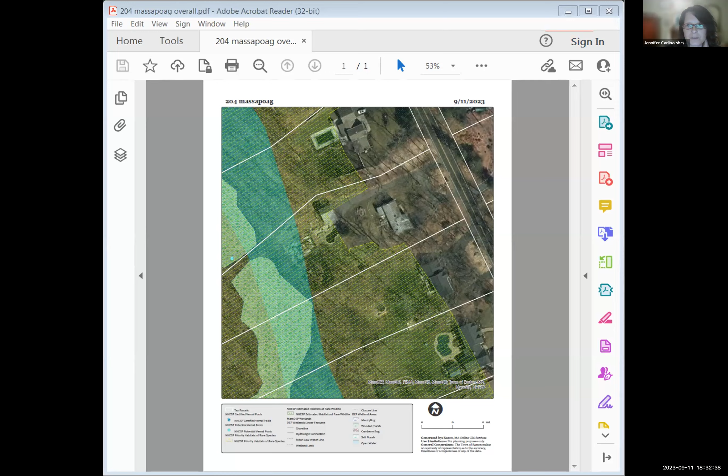I just stopped sharing. I'm going to show you the other map. That looks like the same one. A little bit. Are you looking at the same map or do you see a different one? I see a blown up image of the pool. It's just zoomed in. Okay. I'm good, thanks. For some reason, I see both of them on my screen.

Okay, so here is the pool that they want to fill in. And this is an old tennis court, with a bunch of materials on it. The wetland actually comes up to within 10 feet of the fence around this old tennis court. But this is still pretty significantly far. And their request is to just fill in this vernal pool. I mean, fill in the swimming pool, not the vernal. Fill in a swimming pool. Okay. Is that a concrete pool? Yes. Okay. Yep. I'm gonna stop sharing.

Just see if they popped in here yet. Any new participants? There's a bunch of new ones, but I still don't see Diane. Okay, so from my site inspection and my staff report, my couple of questions are, where are they going to discharge the water? There are fish and probably some macroinvertebrates in the water. How are they going to take care of those? Those I don't have answers to. No. And that is something I had the same concern with. Definitely wanted to know the removal.

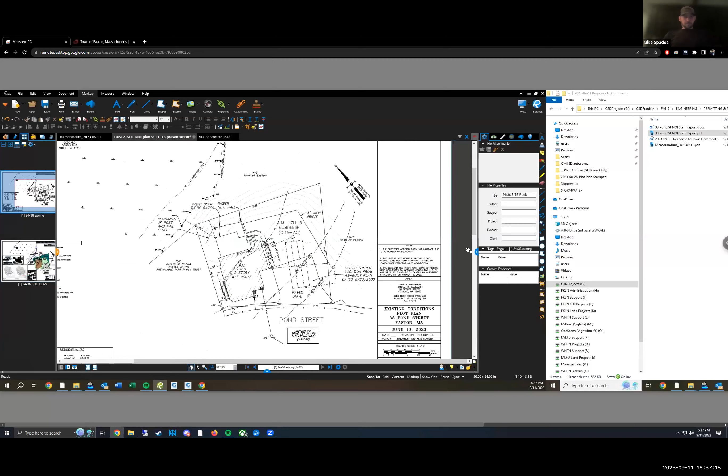So the property is an existing 6,400 square foot lot. It is a 2-story wood frame house. I believe it's currently a 2-family. There's in the driveway a septic system, an existing 3-foot vinyl fence that kind of differentiates the slope wooded area and a lawn area and driveway. There is an existing deck in the back of the house, along, as I heard someone start talking about, the timber retaining wall in the back here.

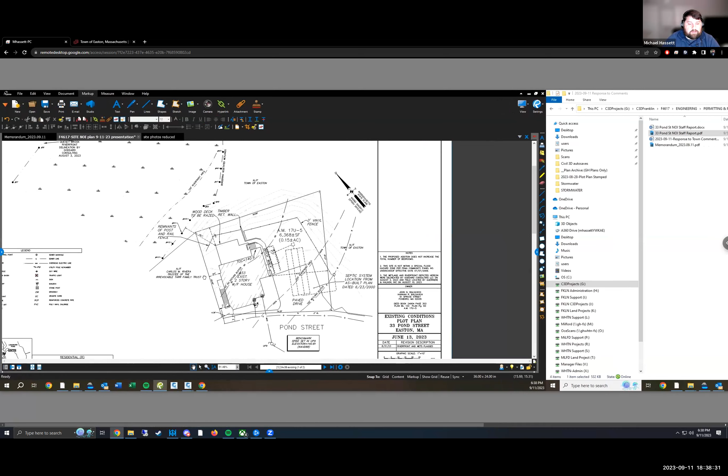And so this brick walk comes from the driveway, comes around the back, and goes down underneath this existing deck to a kind of degraded half old patio, half dirt area. There are the remnants of an old post and rail fence that kind of differentiates the current disturbed area. And that's the limit of the existing site. Let's go to the next page. So before you go to proposed, do you want to show everyone the wetland resource areas? Oh, sure, absolutely, yes. Sorry.

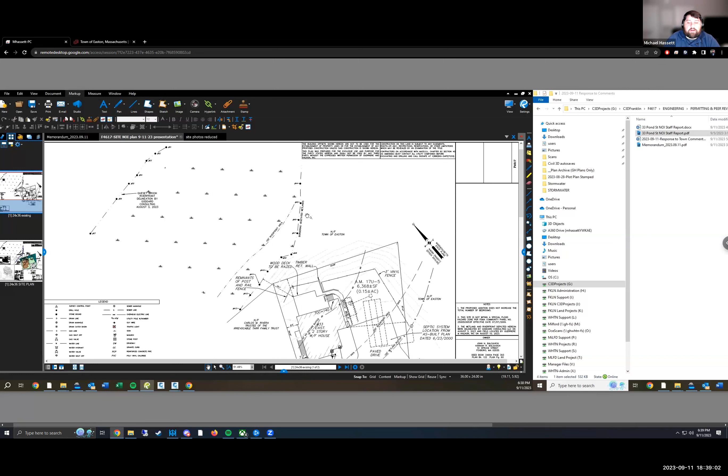So there are 2 wetland resource areas adjacent to the property. There is the Queset Brook perennial stream, and that's delineated by this flag here. That was delineated by Goddard Consulting earlier in August 3rd. And then there is also a BVW line, which is closer to the property, delineated here, also delineated by Goddard.

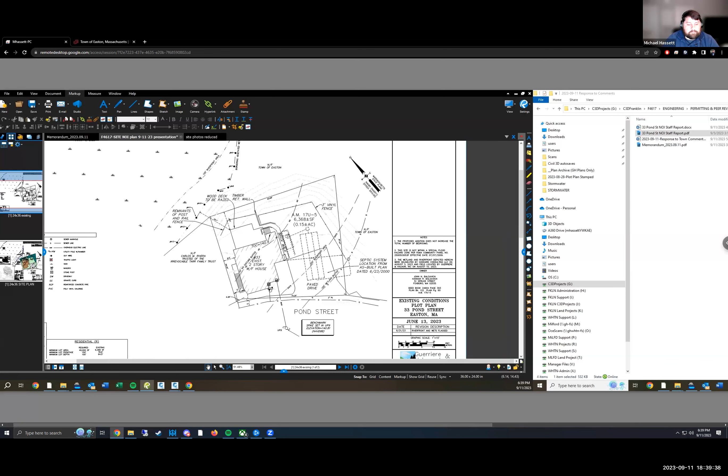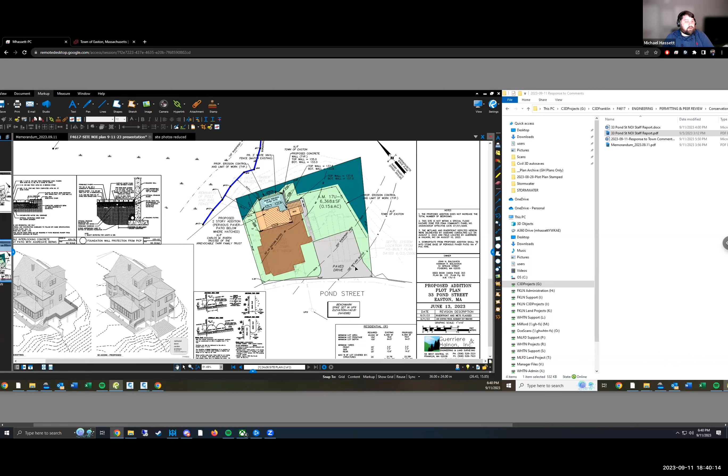So proposed. What they're looking to do is raze the existing deck, and then replace it with an addition. And so that addition is going to be constructed on pylons, so it will not have a traditional basement. And so as far as the ground and any ground critters could observe it, it's going to be like the deck. The idea is to kind of replace it almost with the same thing as the deck, but it's just going to be an addition on top of it as opposed to a deck.

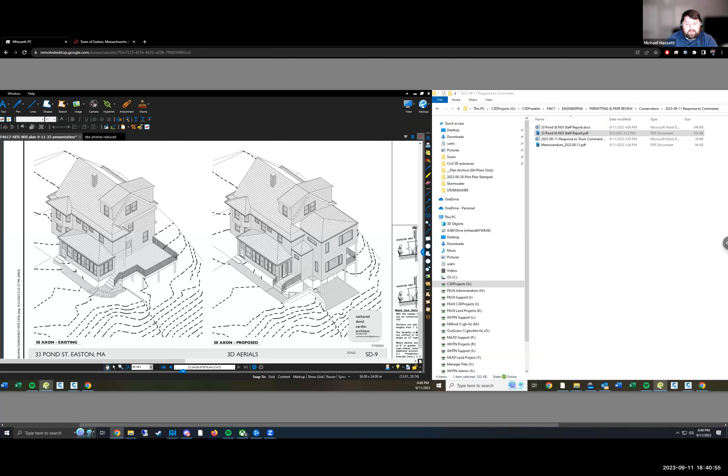And so the best depiction that we can have of what they're proposing to do is the architectural renderings. So this is the existing house, what they have. And then this is the proposed build out. So you can see the existing deck with the stairs down to an area underneath it, and then the proposed 2-story addition in the same footprint as the deck, and then it wraps around, and then there's going to be a pervious paver patio underneath.

And so going back to the plan view here, the darker brown here is the existing house. The lighter brown is the proposed addition and a small outside deck area with stairs down to the proposed pervious paver patio. And then I believe the only additional clearing and limit of work, temporary disturbance, is in this little triangle or square here, where there's going to be some light pulling back of the grade to work with the new retaining wall.

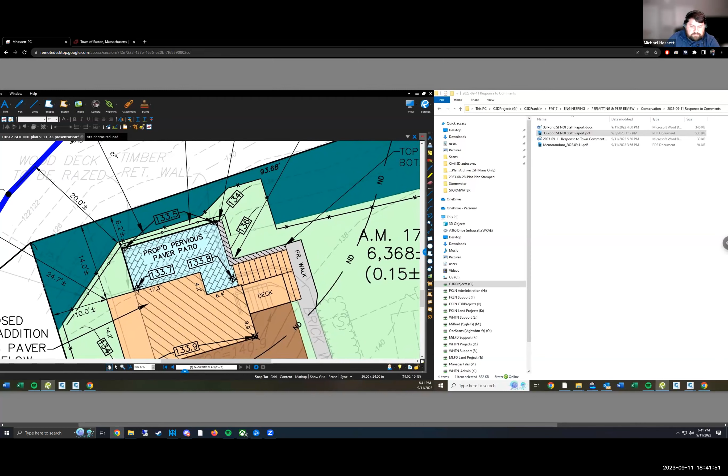But after that, there's going to be a new 3-foot split rail vinyl fence that runs around here and ties into the existing 3-foot split rail vinyl fence. And so after that, this area would be allowed to return to a natural state.

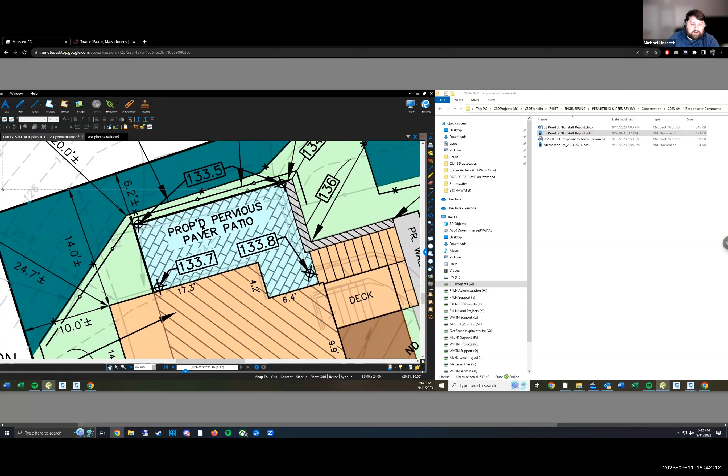Zooming in even closer here, one of the comments we received from Jennifer in her letter was to show the existing split rail fence on the plan. And so that is this gray line in through here. And this little outline here is the existing wood timber retaining wall. And this distance from the edge of the existing timber retaining wall to the new fence is less than 2 feet.

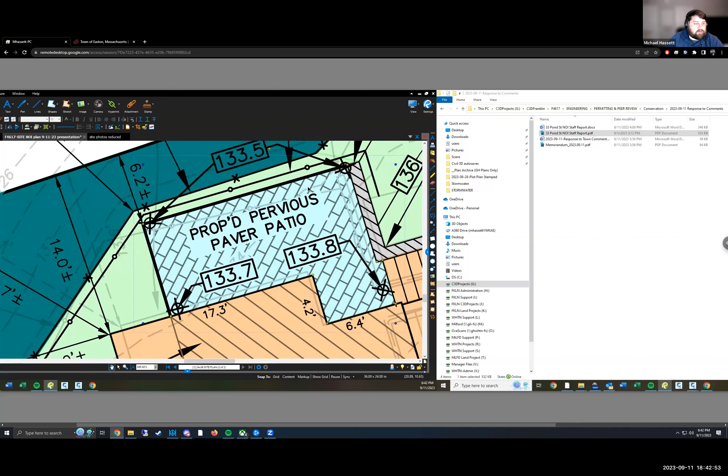So a very, very minor expansion of the limit of work, and very limited grading. I believe we're cutting down a little bit in here to give a little bit more headroom under the new deck, but we're talking about maybe a foot of cut, and so that should also avoid the concerns that Jennifer had with needing to fill out the slope and having stabilization issues,

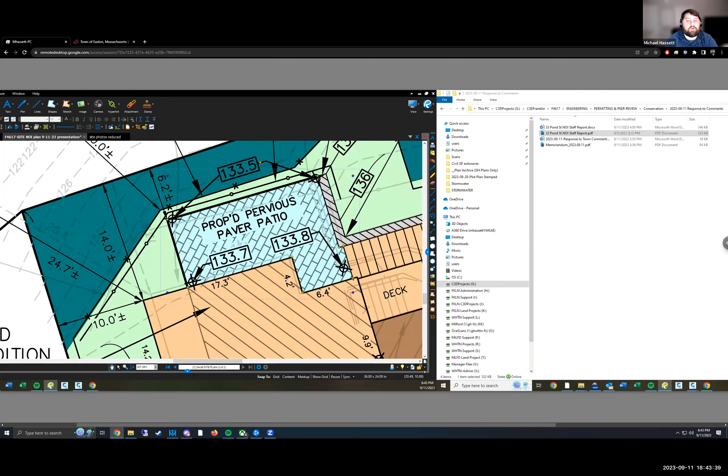because we're actually going to be cutting down, and in the process of cutting that down, it will expand the flat area by about 1 or 2 feet, and alleviate the need for any kind of fill. So we're not looking to expand the disturbance, the nature of the disturbance at all.

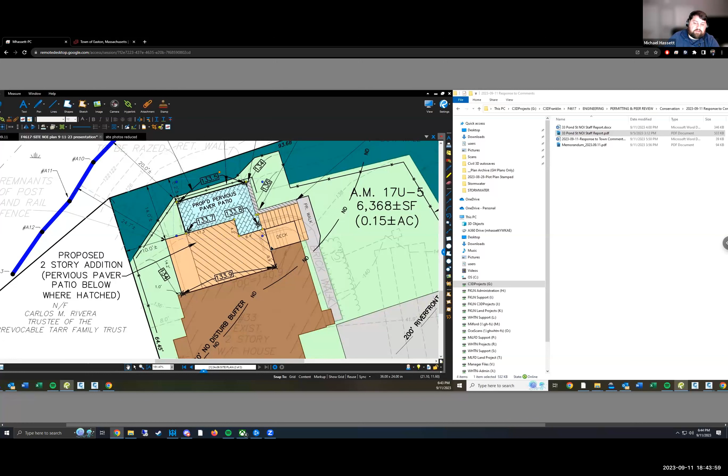The pervious paver patio is to alleviate the concerns the commission might have with increased runoff. The proposed pervious paver patio will actually extend underneath the addition, and it's going to have I think it's a 1-foot storage depth.

Oh, geez. Lost control of the mouse there. What's the depth here?

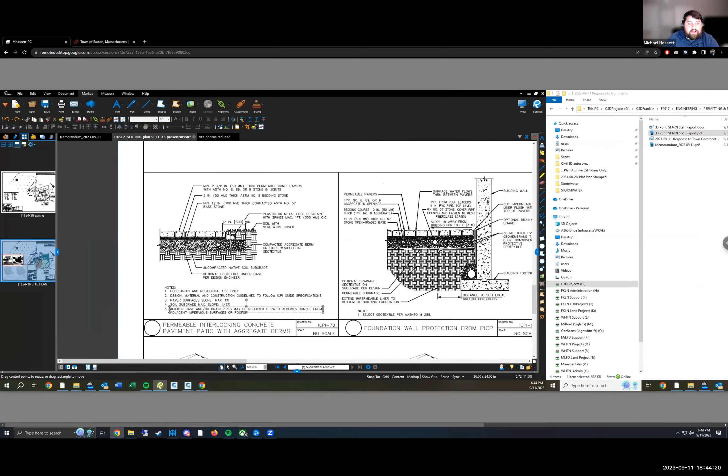Yeah, so it's going to have a 1-foot depth of stone underneath it. And the HydroCAD calculations show that is enough to capture and infiltrate the entirety of the 100-year storm. And so there will be no additional runoff from the site, even during the larger storms. The downspouts from the addition will be routed also into the pervious paver patio reservoir, so that there's plenty of recharge. There's no loss of recharge, and it's actually an increase in recharge from the deck that's currently there.

And so we understand this is a sensitive area and it's quite close to the wetlands. But we feel that given the pre-disturbed nature of the site and the efforts we've taken to mirror the current configuration with our design, that should alleviate all the impacts that might typically be of concern with the proximity. So for now, I guess that'll conclude my presentation, and I'll turn it over to the commission for any comments.

Oh, I will note, actually, before I do that, we've received comments from Mass DEP as well. We're preparing a formal response to both that and Jennifer's comments. To address those quickly, there used to be an optional basement expansion in here, and we've removed that. That was just going to be an additional storage area for the homeowner. But given the concerns and the objections, we felt it best to remove it.

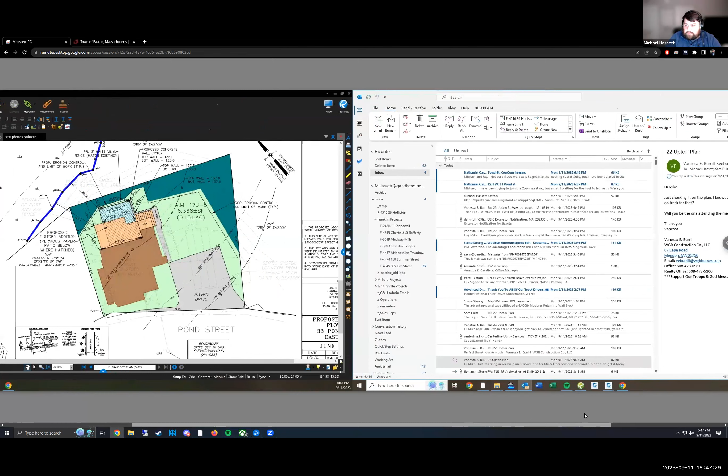And we believe that we are allowed to request this use in the riverfront area under a particular section. I'm trying to think if I have it open. Let's see, 1 second here. No, I don't have it available. I wasn't quite ready for that.

But what we were talking about is it's for lots that were created before 1996. The commission can authorize disturbance in the 100 to 200 foot riverfront, up to 5,000 square feet or 10% of the lot area, whichever is greater. And this lot was recorded in the 1930s. And we feel that in our formal comment letter, we'll be able to address that with Mass DEP and Jennifer.

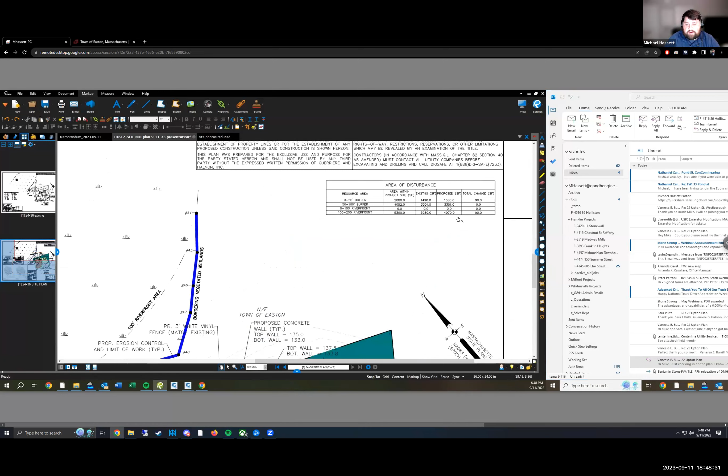But that's the authorization for the amount of total disturbed area in the riverfront that we feel is appropriate. It's under that 5,000 square foot threshold. Our area table is up here, but in the 0 to 50 foot buffer, we're only showing an expansion of disturbance of 90 square feet.

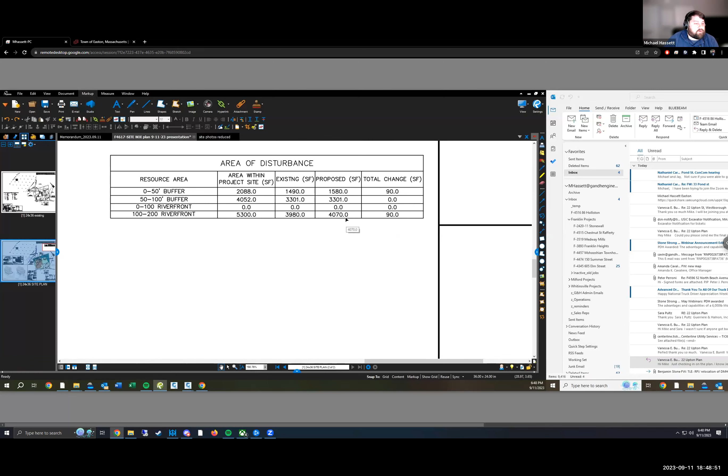And similarly, in the 100 to 200 foot riverfront, we're only showing an expansion of disturbance of 90 square feet. And in the 200 foot riverfront, we're under that 5,000 square foot threshold. And so that's the limit of the presentation, and I'll turn it over to the commission now for comments.

Thank you, Michael. I appreciate it. Jen, here's some comments from you. See what you got. Yeah, just a few. Sure. I'm glad you mentioned that you have a response coming and revised plans coming. That is helpful to know. And so riverfront area, you're talking about the redevelopment section?

Yes, so the MassDEP section, our comment asked us to respond to 310 CMR 10.58(5), section 5, which is the redevelopment section. And I believe, I'm going off memory, so the chapter and verse might not be totally accurate, but the section that we believe is 10.58(4)(d)(1), which is the section that allows for lots recorded before 1996 to allow 5,000 square feet or 10%, whichever is greater. And we'll elaborate that further in the comment response.

Okay, I just wanted to make a note, make sure you answer all of the resource areas. Make sure you address each one. Yes, one of your comments was the performance standards, the narrative documented compliance with the performance standards. Yes. Okay. And so what we're looking at tonight are revised plans. This isn't a plan we've seen before, right? No, these are revised plans, but not significantly revised from what you've seen. It's more of the addition of the things that you requested in your comment letter.

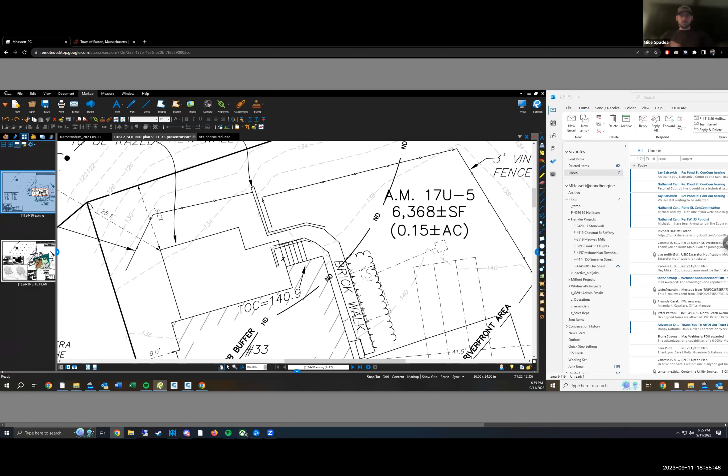require heavy equipment. And then they'll deconstruct the timber retaining walls and stairs going down, and then that will allow for a relatively wide ramp in the back here to get down and do the work in this area. And then once all that work is done, they would kind of work their way back out, building the replacements for what they've deconstructed on the way in. And like I said, this memorandum will go further into it than I can here. But that's my general understanding of the approach.

No, thank you. I appreciate it. Al or Nate, do you guys have any questions? What's the total expansion of the house in square feet? The total expansion of the house, I don't have that number on me. The architect was planning to be here, but I think he also wasn't expecting it to be quite this quick. But I can give you a number back of the napkin in about one second.

So I would guess for ground coverage, the new addition is going to be somewhere in the range of 300 square feet. Times two? Yes, vertically, yes. Okay, thank you. Thank you, Al. Jen, do you have anything else to add? Just that on the plan, it does not look like a very steep slope in the background, but when you go out there, it's pretty steep. So that's the reason for all the questions about stabilization.

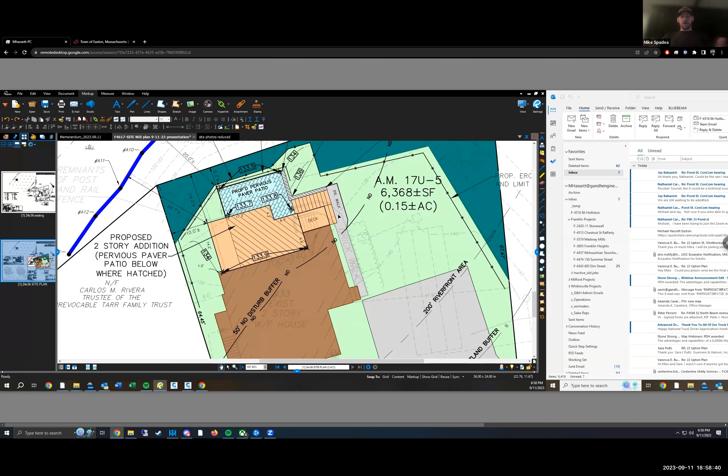And so if during construction we find that we're a little bit over where we want to be, what we would do is shrink that patio in until it's not a problem. So we would take one or two feet off the patio to avoid having to do any work on that slope. Our goal is to utilize the existing flat space out there. That might be the best bet. I mean, being there, Michael, seeing it, I don't know how you'd be able to not touch the retaining wall. It's close, very close.

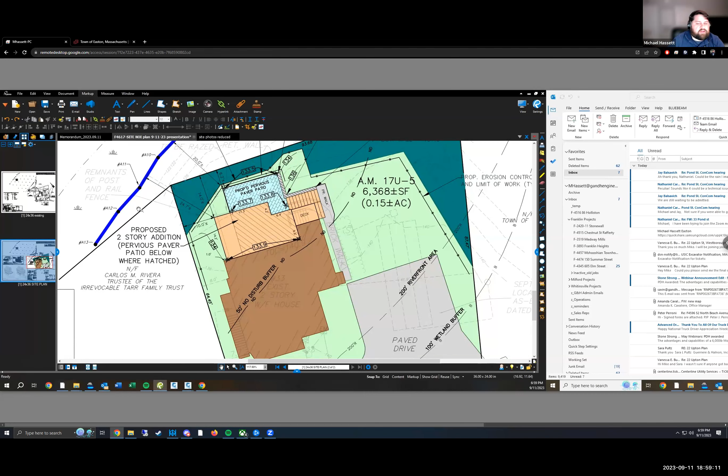When you say the retaining wall, do you mean the slope? Right, the slope. You building that up and giving that some structure. No, there's no intention of doing any work on that slope. Then I've got to imagine that right away, just to make this quicker, the patio is going to get shrunk because you're going to slide right down it. What is the reason behind that? I'm just curious how you determine the limits of the patio. That fence line is right up against where the existing patio is now, and it drops right there, pretty abrupt. So I'm just fearful.

Okay. I just don't know how anything past that fence, like right now, if you put a pervious paver there, you'd be tilted. So you have to add something there, and I know you don't want to touch it. And I get it. So I'm a little worried about what that's going to become. Yeah, and so, like I said, we can explore that further before we submit our revised plan.

But we also feel like where that slope starts will extend out just a little bit, just because we're cutting it out. So that slope's approaching like a 3-to-1 slope in through there. If we drop it 1 foot, that's going to gain us 3 feet horizontally of flat space, assuming you cut it like a cake horizontally, you know what I mean? And so that's kind of what we're banking on to make this patio work.

But if we find that that's not the case in the field, then our only recourse would be to pull it in the 2 feet to make it work. Thank you.

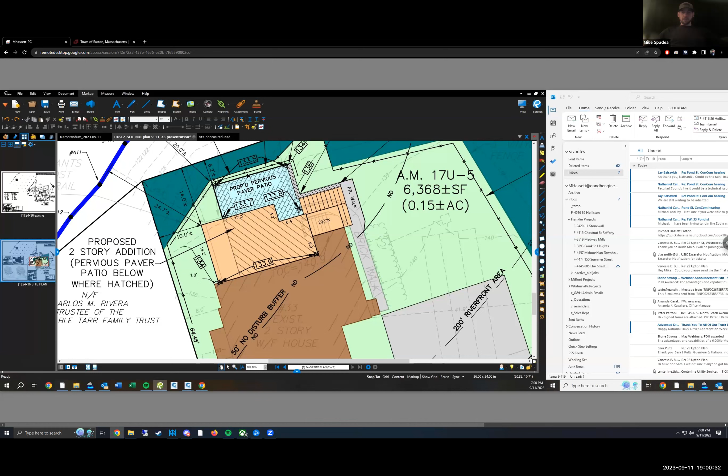So Jennifer, I think probably the best bet is just to continue this because it looks like we have a lot more info we need. We're waiting for more information, so you continue to the 9/25 meeting, assuming you'll have that information to us, Michael, in a week. Because we'd like to have the information at least a week before the meeting, and so that would be a week from today, correct? Is that enough time for you? Actually, it is.

It looks like there may be some people from the project waiting to be admitted to the room. You have to stop sharing for me to let people in. Oh, sure. I just happened to glance over my emails, and there's 5 emails from the owner and the architect. So they would need to raise their hands so I can see who they are. No, I believe they're waiting to be admitted into the Zoom meeting itself. So they should be in the Zoom meeting, they're just not in the webinar as a person like you are. There's no one waiting for admittance. I know when I was looking to join, it had waiting on host to admit you. I couldn't see the meeting in progress, so I don't know if someone needs to admit them.

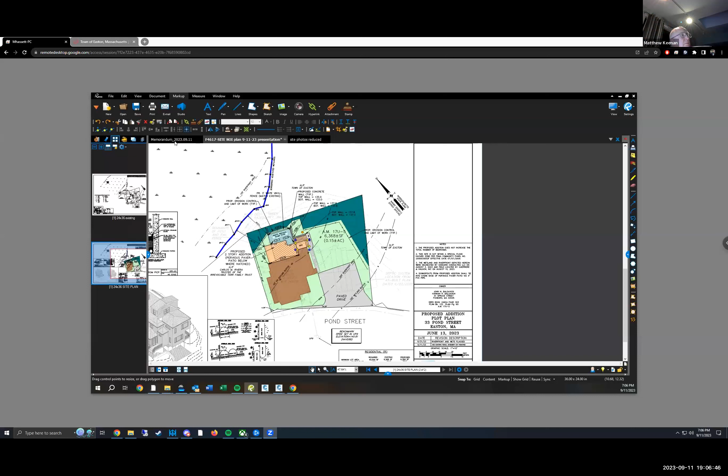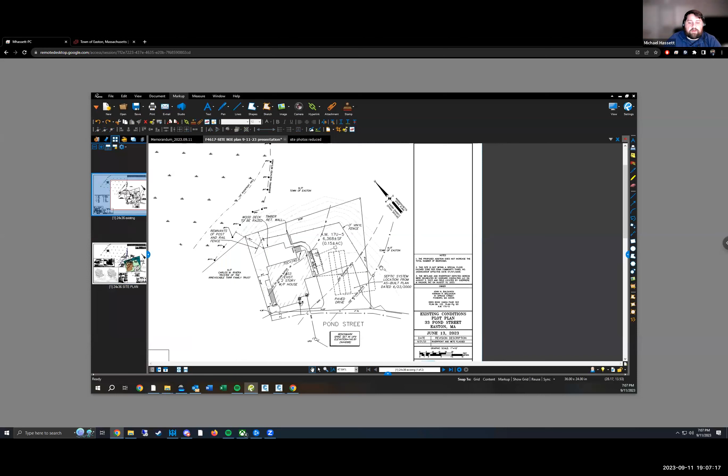Okay, for the record, again, my name is Michael Hassett. I'm here representing the applicant. So this project is located at 33 Pond Street. It is an existing two-story wood frame house that is currently serving as a two-family residence. The existing site is 6,400 square feet, thereabouts. Let's see. There's a paved driveway here, an existing septic system, an existing lawn area in this area here.

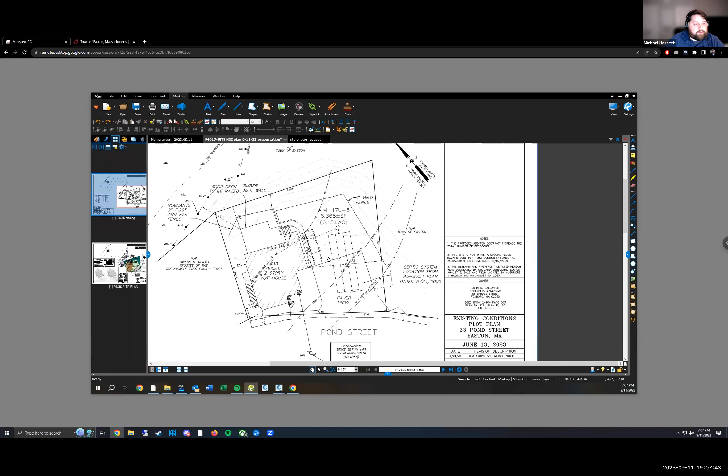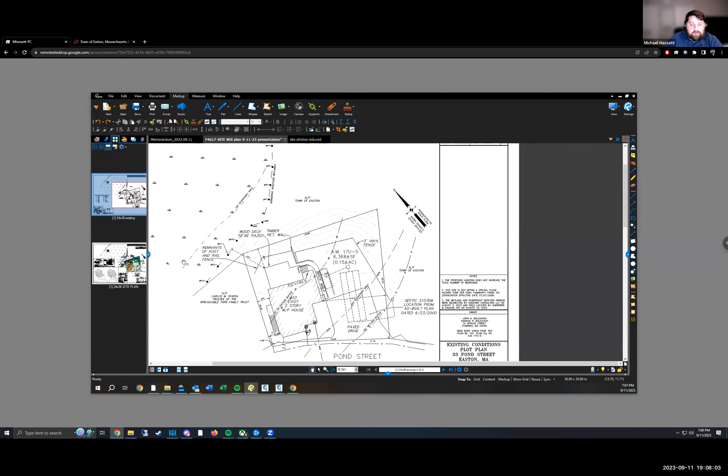And then in the back, there is an existing deck with a stair to below, which is a deteriorated patio dirt area currently. The resource areas on site is Queset Brook, a perennial stream in the back. And then closer to the site is a line of bordering vegetated wetlands. Buffer zones on the site: the 100-foot riverfront area is off-site entirely. This line here represents the 50-foot no disturb. This one out furthest is a 100-foot wetland buffer. And this one here is the 200-foot riverfront area.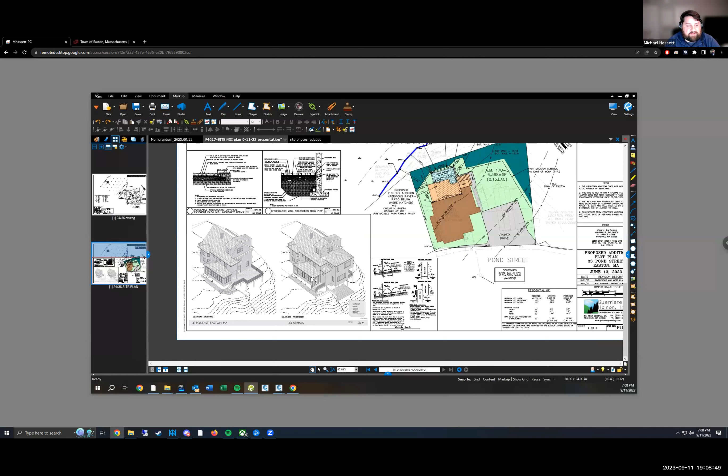And then proposed, the applicant is proposing to construct a two-story addition. This addition would be located in the space currently occupied by the deck. The existing deck would be razed and replaced with this two-story addition. The addition would be constructed on piles. It is intended to function in wildlife habitat terms in a similar way to the deck. It is raised up so that there is no barring of wildlife movement through the area.

And so you can see here on the architectural renderings, on the left is the existing configuration of the house. You can see the deck, the stairs, and then stairs down to underneath. And then on the right, the deck is gone, replaced with this two-story addition with a new deck here, and then new stairs leading down with a new retaining wall and a pervious paver patio underneath.

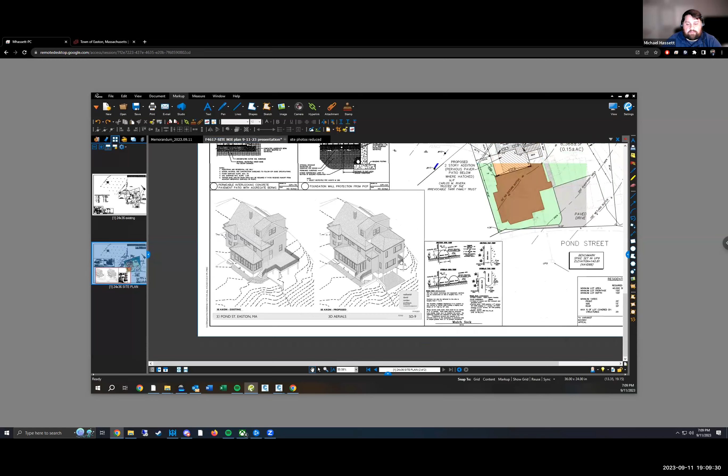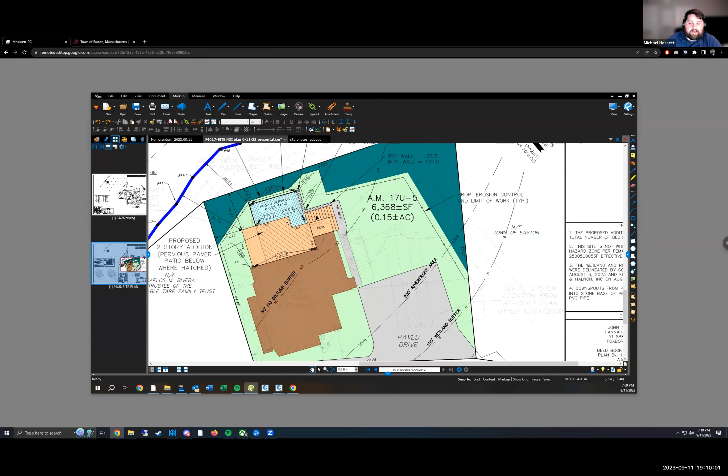And then in plan view, again, this is the BVW boundary here. And then this darker area is existing woods, which will remain. Lighter green is lawn. The gray is existing and proposed pavement through here. The light brown is the addition and deck with stairs. And then the teal color here is the pervious paver patio.

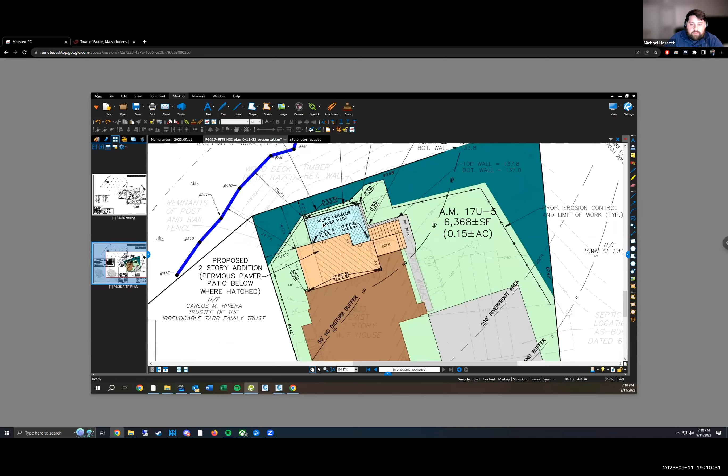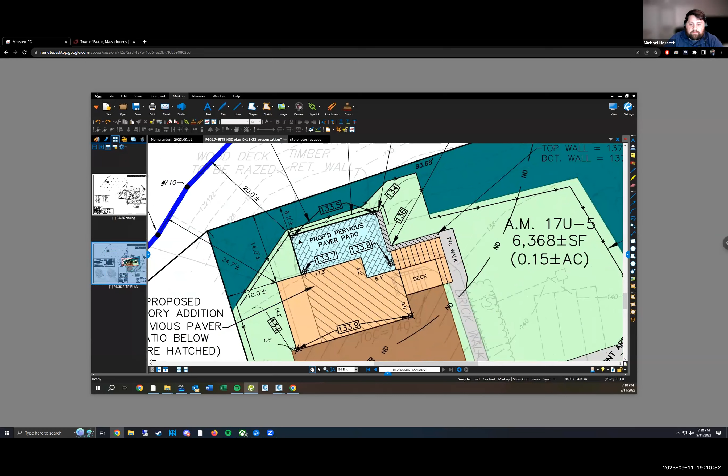The pervious paver patio was proposed to ensure that all runoff from the proposed work is recharged. It is sized to accommodate the 100-year storm, so there will be no runoff from the addition. The downspouts from the addition are routed into the pervious paver patio as well. Zooming in, limit of work, a new 3-foot split rail vinyl fence is proposed. The black line with the X, that's the proposed erosion control. The existing post and rail fence is this gray line coming through here. And this is the existing timber retaining wall.

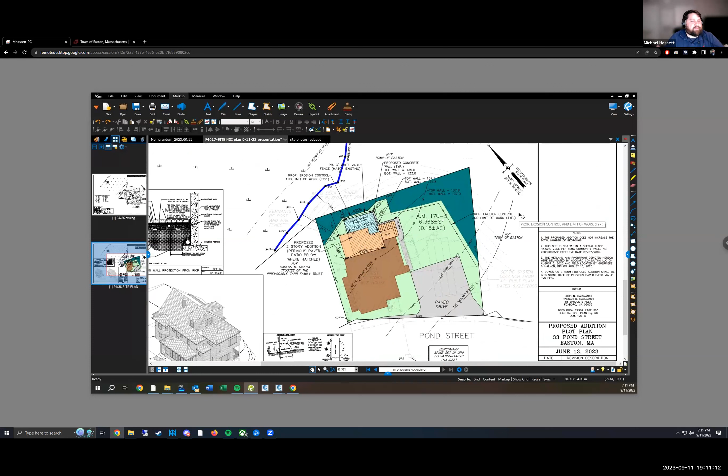So I think that covers what I covered before. So I don't know if we need to go through what happens next. The commission can kind of reiterate their comments and concerns, I guess. Yeah, definitely. We can try to summarize that a little bit, just to make sure everyone in the audience does get to hear the comments. So there's a staff report, and the Department of Environmental Protection has also provided comments asking for compliance with the state law under riverfront area, as well as our local bylaw.

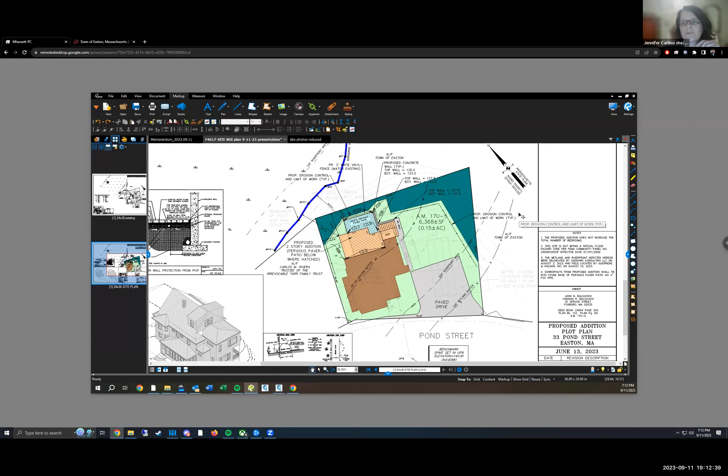And there's some concerns with the slope in the rear of the property, how equipment will get in and access the property. You have a mini excavator proposed that should be able to create a small slope to get into the back patio area. Make sure you address each of the performance standards in their comments. And you're removing a foot of fill in the existing patio area. That is the bulk of the conversation. They will be providing additional information to the Conservation Commission for their and my review, as well as Department of Environmental Protection. And so they will be continuing the public hearing until 9/25.

Sounds good to me. Just stop sharing so I can see if there are any questions about 33 Pond Street from the audience. Nathaniel, yeah. Go ahead. I am Nathaniel Carden, for the record, residing at 50 Brightwood Avenue, Providence, Rhode Island.

I just wanted to add that the existing conditions are in disrepair, and the wood retaining wall, a pressure treated wood retaining wall, is in the process of failing. It's at the end of its life and is in need of replacement. And so it could potentially pose a greater risk in terms of erosion down the road, and sediment runoff into that conservation area if it's not addressed. So we're hoping to make site improvements with this project that would have a low impact when compared to the existing conditions.

Excellent. Thank you, Nathaniel. Any other public comments from anyone? So we're seeing none. All right. So we will continue this hearing, Mike, like we had spoke about already. You guys have any other comments you'd like to add yourselves? Good to go. All right.

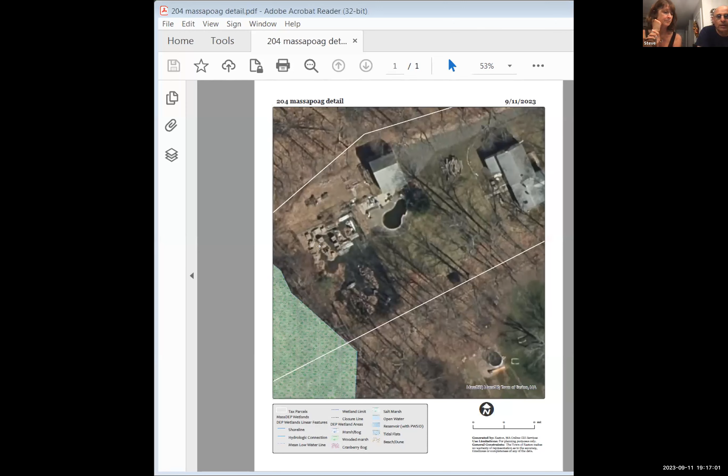I just wanted to know how you guys feel about it and any concerns that you might have. We're not going anywhere near the wetlands. There's an apron around the pool, and then there's a tennis court that actually abuts that. We're about 85 feet away, like you said when we met before. So I just want to figure out what you're thinking. Well, I'll open that up. I'll start that off. Nate, do you have anything you'd like to ask?

Yep. One of the things I'd be interested in learning is what are they gonna do to fill the pool? Where's the fill gonna come from? Are they gonna leave the cement in situ? What are their generic plans for that?

When I spoke with the building inspector initially, he didn't have a problem with it. We're gonna jackhammer holes in the bottom of the pool for drainage, and we're gonna bring in clean gravel fill, and fill it to maybe about 4 inches from the top, and then bring in 3/4 crushed stone and have like a kidney-shaped patio.

Utilize it that way and keep the apron that's there, the concrete apron, just keep it there, and put a fire pit in the middle or something like that. But I do want you to know, there was a lot of rubbish all around the other wetland area. And I think Jennifer had mentioned something about cutting stuff, weeds and stuff like that. And she did say that, and I want to just address that in case you forgot.

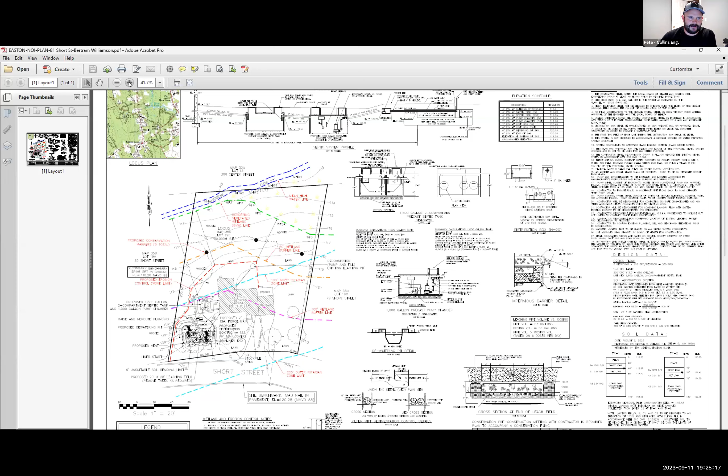The 50-foot and 100-foot buffers cut through the site to the wetland. The 100-foot inner riparian resource line for the stream cuts the site in half, and the 200-foot falls out in Short Street. If I zoom in, you can see we've done everything practical to push the proposed work into the front corner of the yard, maximizing the distance to the resource areas. We're proposing a new 1,500-gallon septic tank and a pump chamber just outside the 100-foot buffer, dimensioned as 103 feet to the BVW and approximately 110 to the stream.

The leaching field will be a pipe and stone field, slightly elevated in the front yard in an existing lawn area. Also in that area are some significant trees that are going to be taken down as part of the project. We've proposed a soil stockpile area in the front yard, again maximizing the separation to the resource areas. We have erosion control shown as the red dashed line, wrapping around the entire system, the proposed work, and the decommissioning of the existing leaching pit in the backyard. We have additionally shown 3 conservation post locations along the existing tree line.

A couple other quick things on the plan. The filter sedimentation control detail is shown with a 12-inch filter mitt staked every 6 feet. We also have dewatering pit details, hay bales and some filter fabric, shown between the leaching area and the septic tanks, where the dewatering would most likely need to occur. So that's our overview. If the commission has any questions, I'd be happy to answer them.

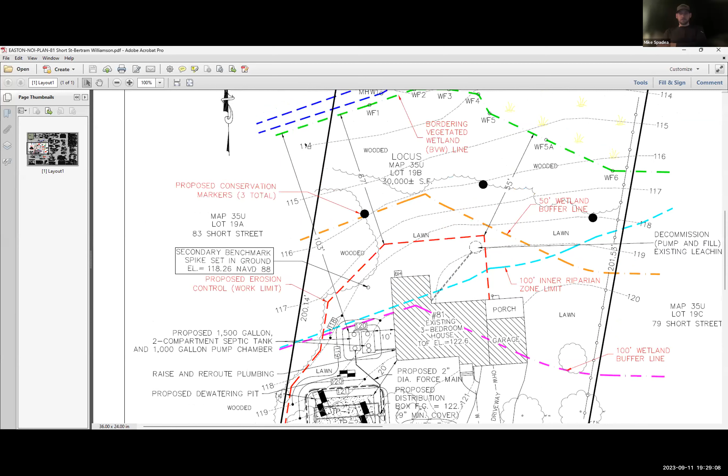Oh, thank you. Al or Nate, any questions? I'm good. All right. Jennifer, any questions? Just a quick comment: during the inspection, one small area with some metals was observed and they immediately went in and removed them. Perfect. That's it. Well, sounds good for me.

Peter, you want to close the hearing? Yes, we would like to close, please. All right. Okay, so we can close the hearing for, let's see where we are, 81 Short Street. Benson second. All right. And a roll call vote. Benson, aye. Crossman, aye. Spadea, aye. All right.

So we're gonna do a motion to issue an order of conditions to replace a septic tank for 81 Short Street. Order of conditions, sorry. Rossman second. Excellent. Roll call vote. Benson, aye. Crossman, aye. Spadea, aye. All right, Peter, you're good to go. All right, thank you all. Okay, thank you.

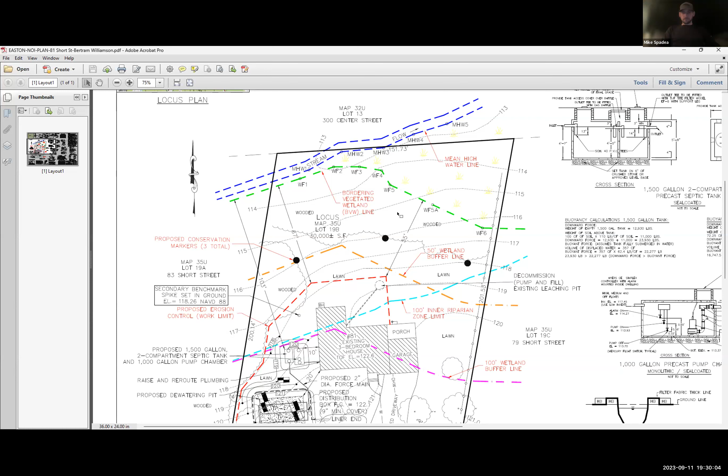All right, next up, where are we at here? Let's see. Next up is 38 Randall Street, I believe. So we did 33 Pond. Nobody else has questions about 33 Pond, right? No other hands? Okay, and then 102 Eastman Street, they have requested a continuance. Yes, I just mentioned it, good to go? But we have to vote.

Okay, so let's vote. So you make a motion to continue the hearing to 9/25. So moved. Looking for a second. Benson, second. Excellent. All right, roll call vote. Benson, aye. Rossman, aye. Spadea, aye. Okay, excellent. Now you're on Randall. 38 Randall Street, and this is for a request to amend the order of conditions. Let's do it.

Hey, there I am. So Eric, introduce yourself real quick for the record. Yes, for the record, Eric Dias, registered professional engineer with Strong Point Engineering, here tonight on behalf of the homeowners at 38 Randall. Before I share my screen, last time we were here, you guys are familiar with this. We are proposing basically to enlarge the backyard. These folks bought this property with an existing notice of intent, a very small yard, because the prior owner was trying to stay under the 10% local riverfront threshold. We've proposed to expand it a bit to allow them some space for the young kids to play, the dogs to run, things like that.

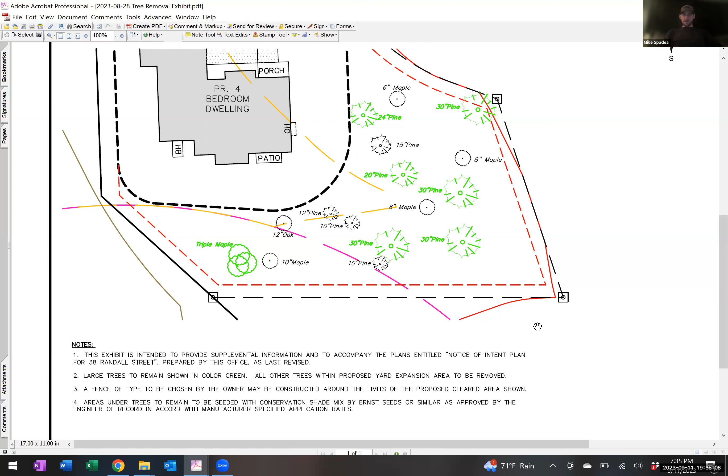Matthew, you can go right ahead, my friend, and turn on your microphone and ask away. And if you just want to introduce yourself for the record once you unmute yourself, that'd be great. Thank you. If you're looking for the mute button, it should be at the bottom left of the screen or the app. Maybe in the file too, and if you click on that, it should say unmute somewhere around there. All right, you guys are good. We can hear you now. All right, yes. Matthew, just introduce yourself for the record, and you're all set.

My name is Matt Keenan. I live at 8 Randall Street. And my wife Patricia, same address, 8 Randall. All right, Matthew, if you'd like to ask your questions, go right ahead. How much land are you talking about? Let me just pull up the plan real quick. Give me just a second. We do have it tabulated, I just don't have it right in front of me. So we are proposing to clear 7,600 square feet.

Well, under perpetual condition 5, you're not allowed to clear more than 3,785 square feet in lawn. And on 12/21, the owners opted to enlarge the house and the driveway and eliminate the pool and pavers. So why did they enlarge the house and get rid of the backyard? Now they want to come back and have a bigger backyard? They made that option when they went for the first amendment in December.

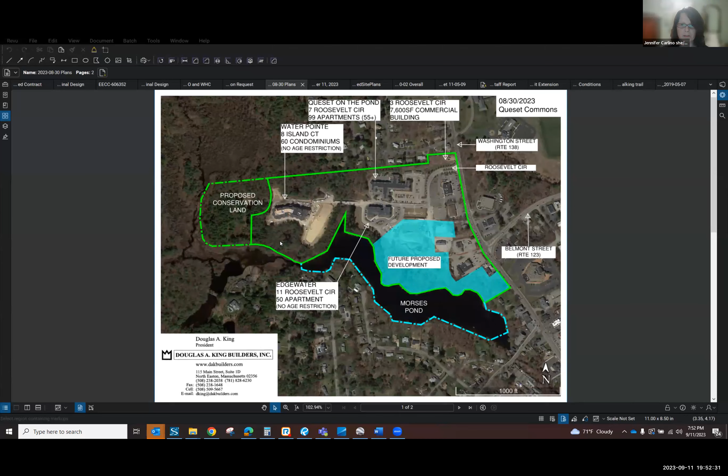So, buildings B and C, they're going to be mixed use. Right now they're still kind of working out the plan with the town for what building B is going to be. And then the food mart and the office building will be more on the frontage, I believe. Okay, and then an extension of the walking trail, and I'm assuming whatever stormwater management is associated with all of those buildings and the rest of the road.

Yeah, so Sam had mentioned that the overall stormwater plan was approved with the master plan approval, and then each sub-phase drainage is reviewed as built to assure compliance with present stormwater standards. Sure, but that's what's left to be developed. Correct. Okay. Thank you. That plan is helpful. Glad that worked for you.

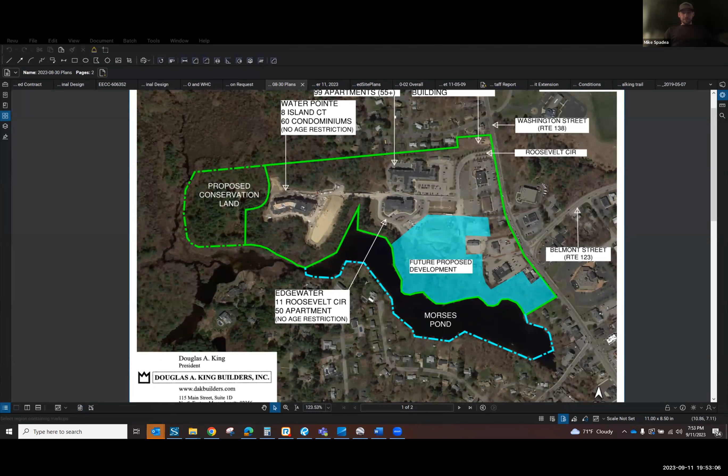Any questions from the commission? Seeing none. Yeah, I don't have any myself. This was pretty clean. So that was a hard act to follow. So I'm sorry I'm so uneventful.

That is okay. So the permit expires 9/6/23. They did request it more than a month before it expired, so that's okay that we're issuing now. And you're requesting how long of an extension? It's a 3-year period, correct? The commission may issue an extension up to 3 years. Up to 3 years. So definitely the full years is what they would like to request. Nate, Al, do you have any thoughts? You're okay with 3? All right. Yeah, and I was okay with 3 myself.

Excellent. Jen, are we cool to close the hearing? It's not actually a hearing, it's just an extension. So the motion is to extend the permit for 3 years. And so that will expire on 9/6/26. So moved. Second. Beautiful. Roll call vote. Benson with the second. Benson, aye. Crossman, aye. Beatty, aye. All right, Erica, you are good. Thank you. Have a good night. Have a good night.